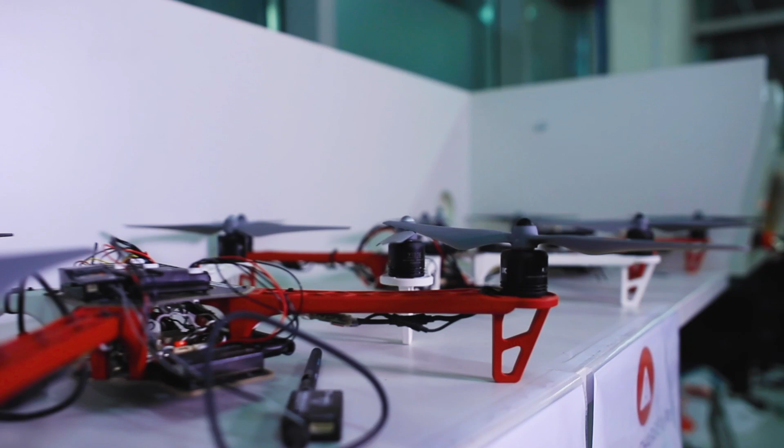Robotics, artificial intelligence and the systems that drive them are drastically changing the world we live in. From the factory floor to outer space, robotics is essential in optimizing industry, saving lives and bringing people together.

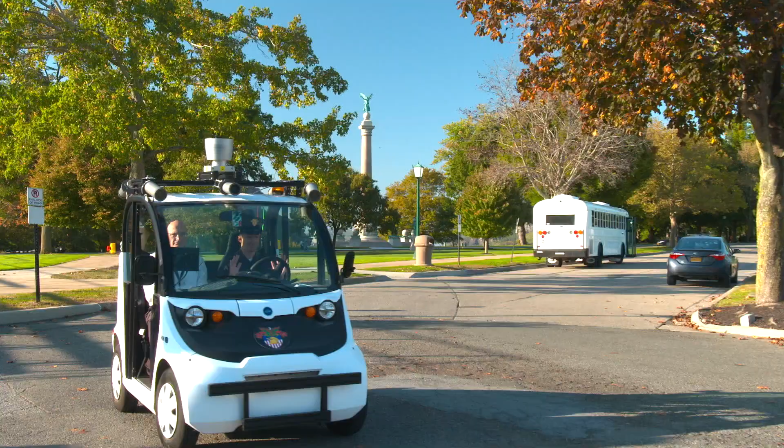Now in Macau, China, robots are connecting people in more ways than one as researchers, educators and practitioners in robotics meet for the world's most important robotics event. From autonomous driving to marine exploration, drone swarming to medicine AI, it's all here at the 2019 IEEE RSJ International Conference on Intelligent Robots and Systems. And you can catch it all here on IROS TV.

It's day 3 here at the Venetian Macau and things are really getting underway. We've had technical session after cutting edge forum, plenary after keynote, all with the very latest in robotics and AI. We've got plenty more for you today as we take a look at how robots are becoming ever more human, from human level intelligence to robots working alongside humans. Let's take a look at what's coming up.

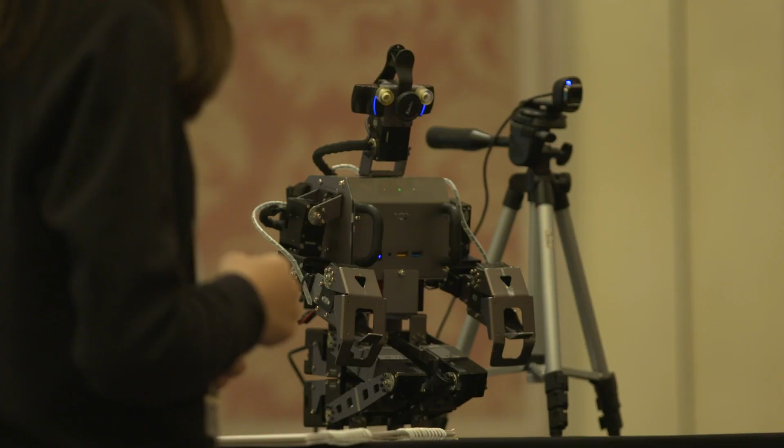So wouldn't it be cool if your robot could give you a high five after it delivers you your medicine in the hospital or after it helps cleaning up the kitchen? The reaction that we get with our robots when we perform a magic trick is often quite magical in itself, because people are like, how did the robot do this? That's incredible. Most of the robots are made by us, roboticists, engineers. We're good at making robots that are robust or powerful, but we're not good at making robots that are actually useful for the people.

Humans are complex and our interaction with robots can be somehow unsatisfying. So to take a better look at how we can optimize that human interaction with robots to make the experience smoother and more effective, I'm absolutely delighted now to be joined by Professor Gentiane.

Professor, welcome. Thank you very much for inviting me.

So what are the limitations today with human interaction with robots? Well, we do have a lot of robots that we can see here at the conference and the exhibitions and everything. But these robots are more like industrial robots, or robots to be in industrial settings or very closed settings. They're not really interacting with humans, and when they do, they don't have a lot of functionalities. So we still have hardware limitations that we need to overcome. Industrial robots is something on the side, but we're building so-called social robots that don't have any social function, or they don't do anything, so they're basically just like empty shells and boxes.

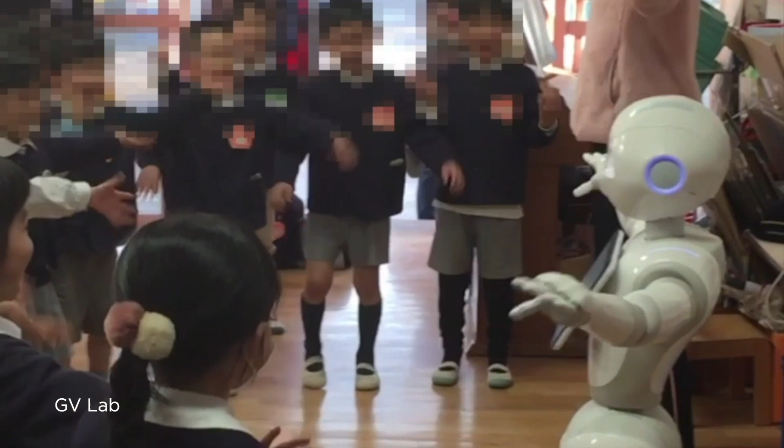Indeed. Well, give me an example of that. So for example, the robot Pepper that we're using a lot in our lab, and I'm very grateful to SoftBank Robotics for having made that robot, is a very affordable platform, but it's big. And when you have it in your living room, it is too big for the few functionalities that it actually has. And when you have it in social or public spaces, it's usually too weak in terms of sensing abilities and communication abilities. So basically it's a very fancy tablet holder.

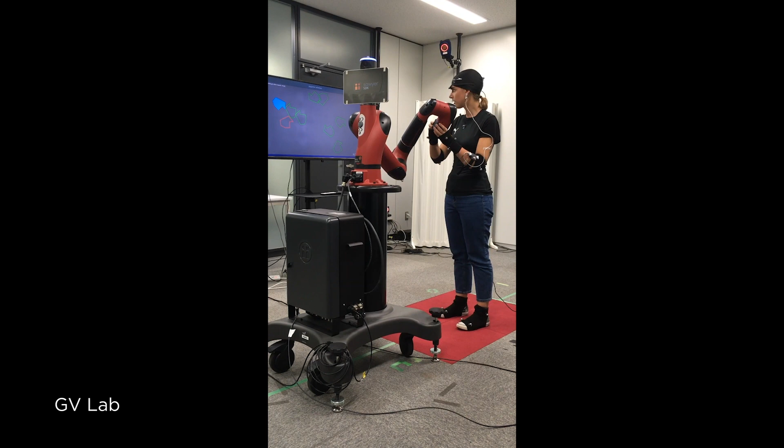Okay, and what's the answer? How do we design better robots that more fully fulfill our social needs? I think there is a big trend now in robotics and in HRI in general, which is really working in collaboration with potential users of robots, designers, and people who know how to create interactive systems. Well, give me an example of that.

So in my research, one of the examples I found the most striking is the work we're doing with ergonomists and designers, where we're trying to understand what the needs are for young retirees and how far the actual robots are from their ideal robots. When they create these ideal robots in their mind, after they have an experience with an actual robot, they change this ideal to something that is probably more realistic. Because science fiction movies and imagination have created these amazing, almighty robots, and everybody wants an almighty robot that is tiny, powerful, intelligent, cute, and sensitive.

On the other hand, we have, for example, Pepper, which is like a very bland white box of plastic, quite giant in your living room when you have a tiny house, and it does pretty much nothing except stare at you. We programmed it to be a little bit more intelligent than the regular Pepper, but it's still not perfect. If you ask, 'Pepper, can you give me a glass of water?' it just says, 'I'm sorry, I'm too weak to give you a glass of water, and I don't know where the glass of water is, and I cannot turn the tap on.'

So what are the next steps in bridging this gap? We have collected a tremendous amount of information about the ideal robots that people want to have. So now we're prototyping new robots that are smaller than Pepper, and we will conduct the same type of experiments to see how people like it better than Pepper, and if it matches better their expectation of ideal robots.

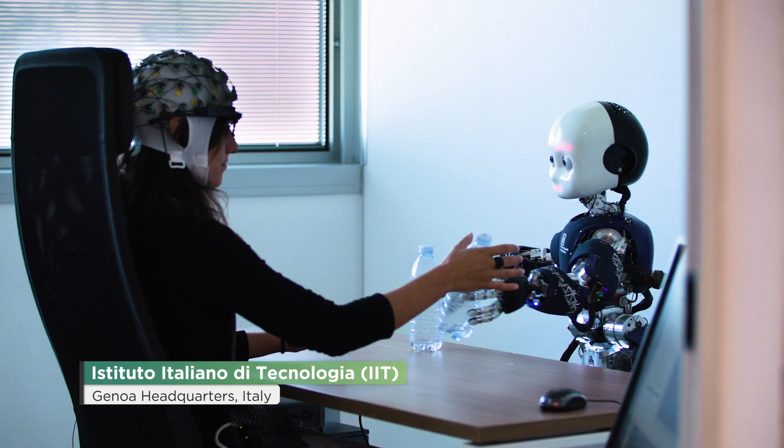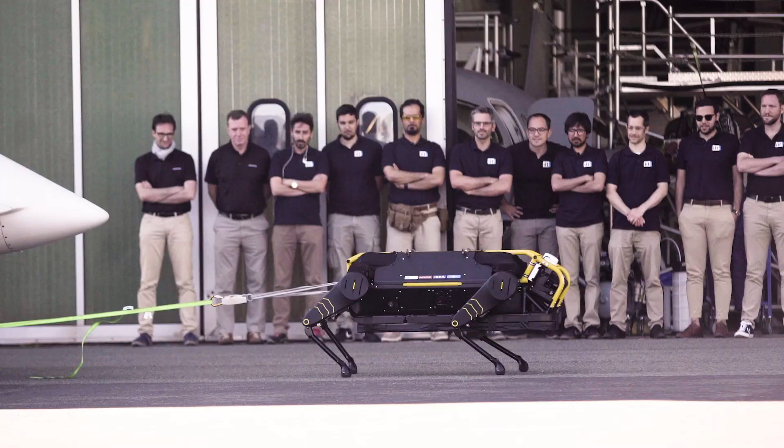I think robotics will play a very important role in the future. I see robots in healthcare allowing, for instance, surgery to be very precise. I see robots in case of disaster intervening to save human lives. In robotics, we have a mission to help and empower humans, and therefore everything we do has the human at the center.

IIT, the Istituto Italiano di Tecnologia, is a research foundation. We do material science and nanotech. We do robotics, of course. We also do life technologies, which is biology and possible applications to healthcare.

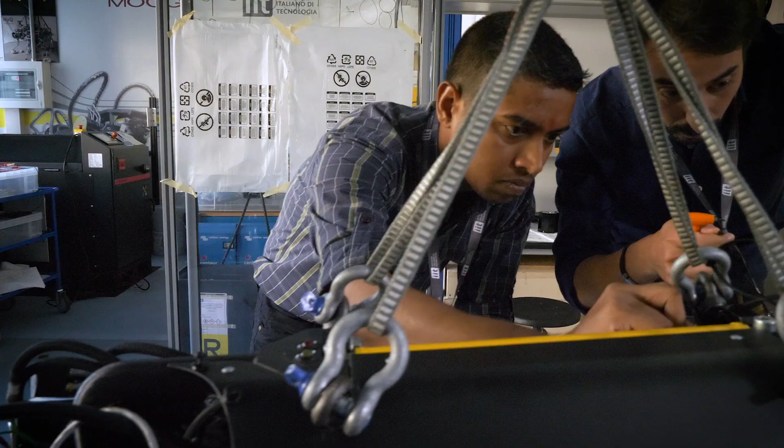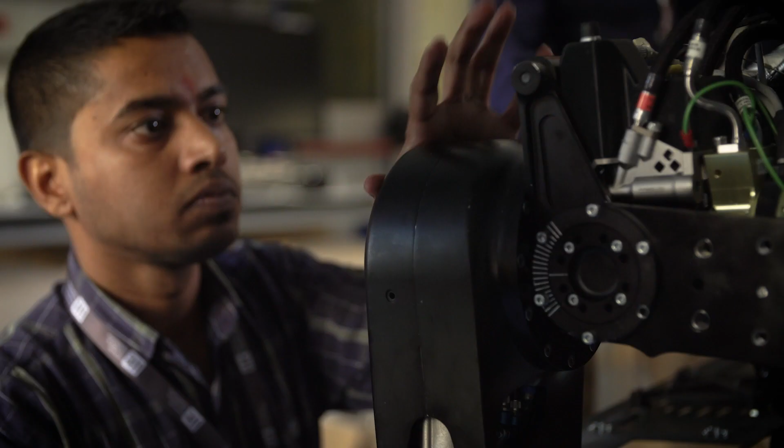We have a very large program in robotics, with more than 350 people. We cover the entire design process, from the mechanics and electronics to the software. It's very diverse, but in a sense we're developing this family of robots, each one tailored for a different sector.

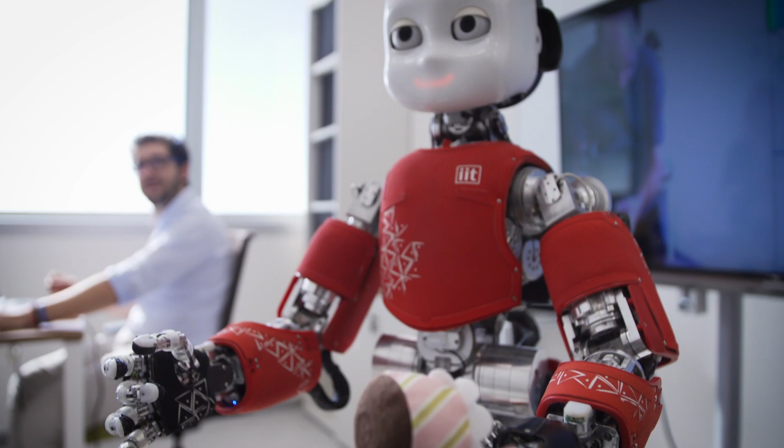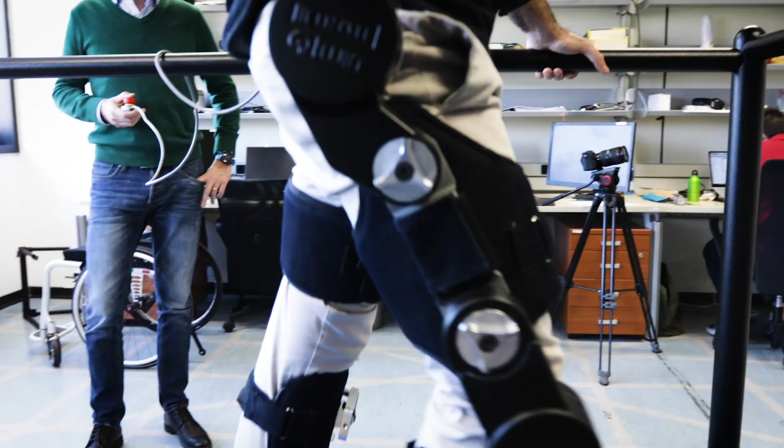In the Advanced Robotics Group, we develop robotics for biomedical applications. This comes in two flavors: one is surgical robotics, and the other is rehabilitation. Here we develop exoskeletons or prostheses. We're developing exoskeletons also to help human workers in the factory.

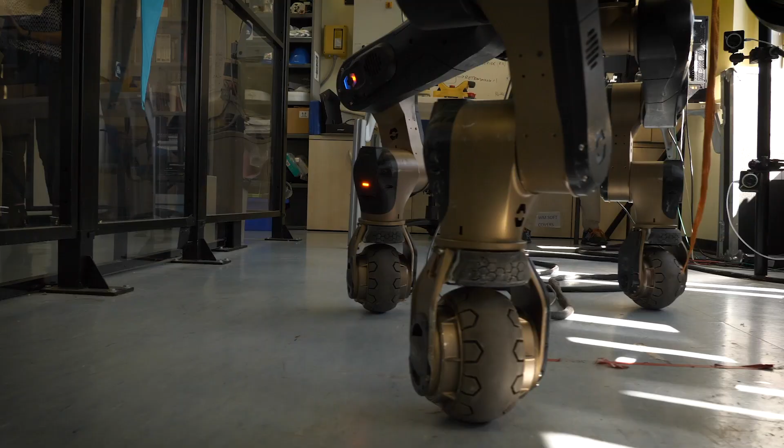We're doing, for instance, quadrupeds that can be deployed in case of disaster. We're also developing humanoids for the same purpose, so that humans can be safe while the robot carries out a particular task.

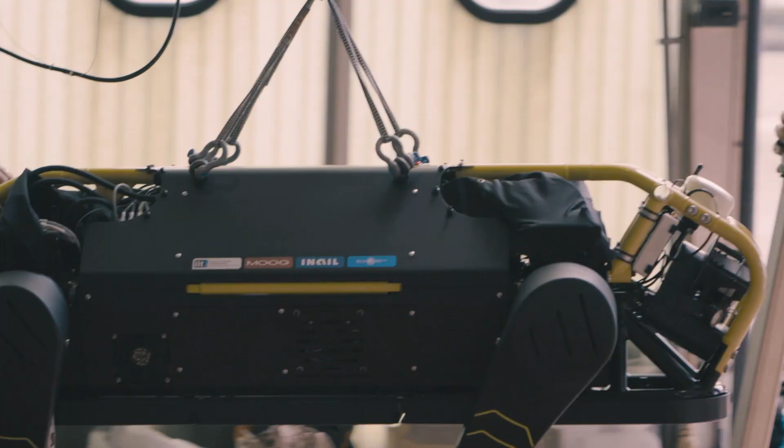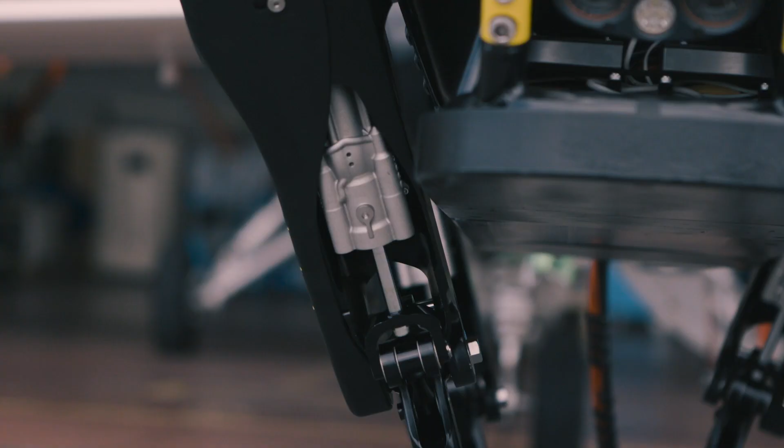The whole purpose of legged systems is to go onto environments where wheeled and tracked vehicles cannot go. The most recent version of our robot is called HyQReal. To demonstrate its power and its nice design, we brought it to the airport of Genoa so that it can pull a 3.3-ton airplane.

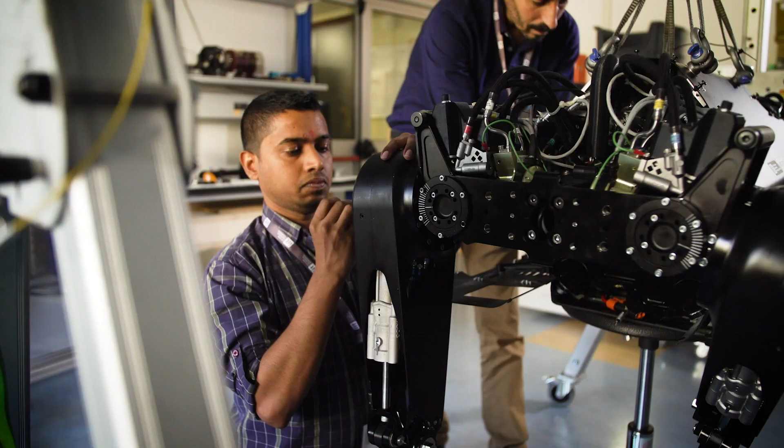All our robots are driven by hydraulic actuators. The hydraulic actuator has a very high power density and can cope with impacts very well. One of the grand challenges of legged systems is how to place the foot on a correct spot, so we have developed an approach in which footholds can be selected and corrected in a very fast way.

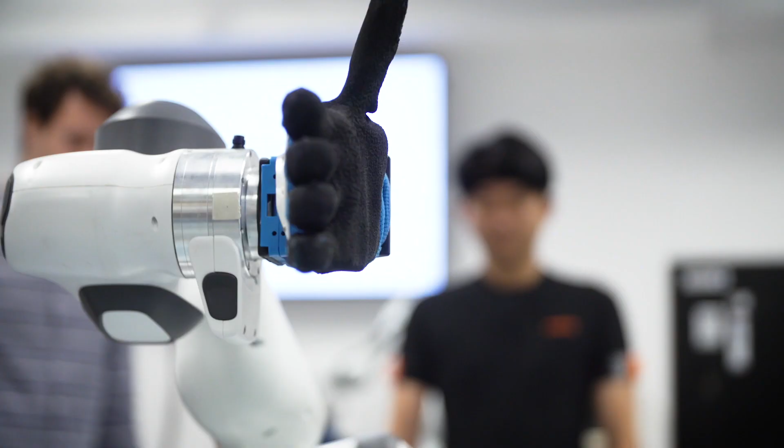At the moment, our focus is industrial robots. They can be fixed-base or mobile-base. Mobile robots can be just like humans, going around, doing some scanning, understanding and responding to the needs of people. We recently created MOCA, which stands for Mobile Collaborative Robot Assistant, the integration of a robotic arm and a mobile base. The more you bend your body, the faster the platform will move.

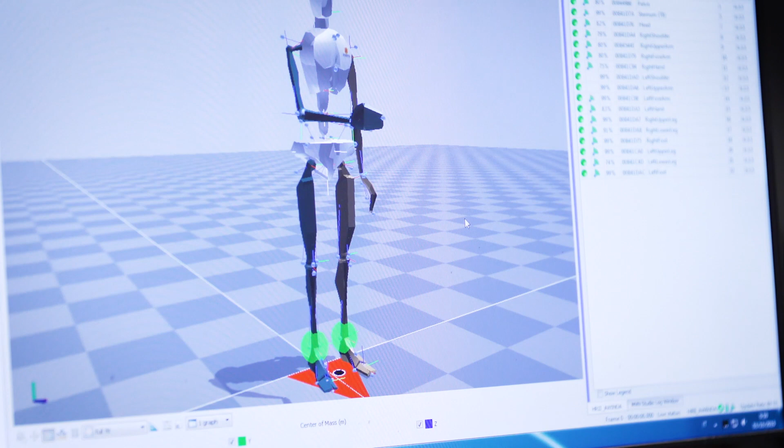We are trying to introduce these systems in industrial applications to see who is the co-worker they are supposed to work with, to respond to their intentions and needs, both physical and social, and eventually to improve their ergonomics of working. It's a revolutionary way of thinking about improving productivity in industrial environments that are dynamically changing.

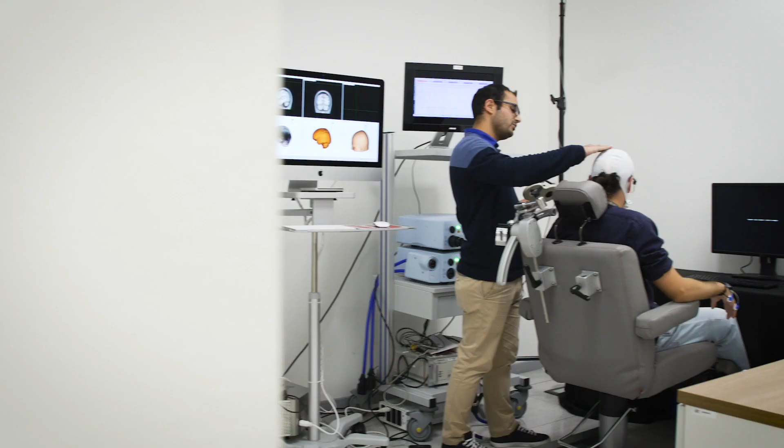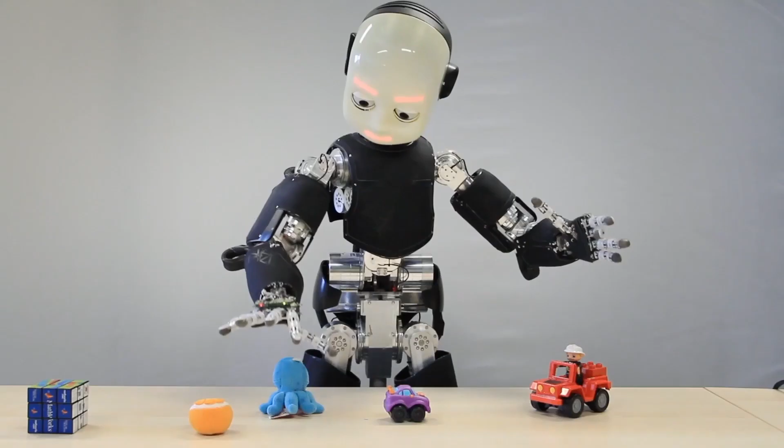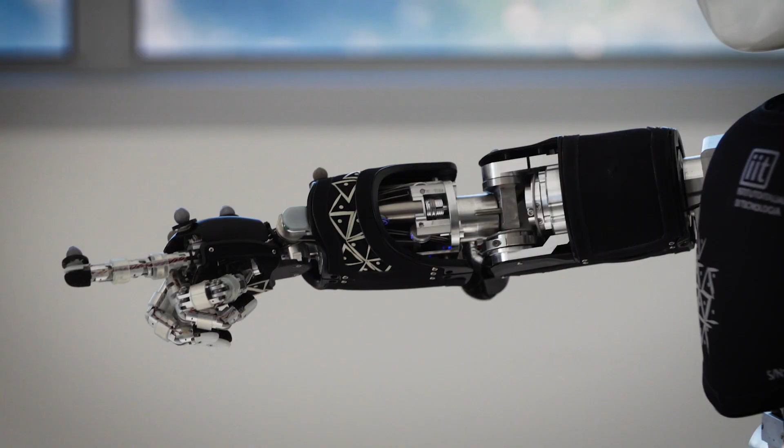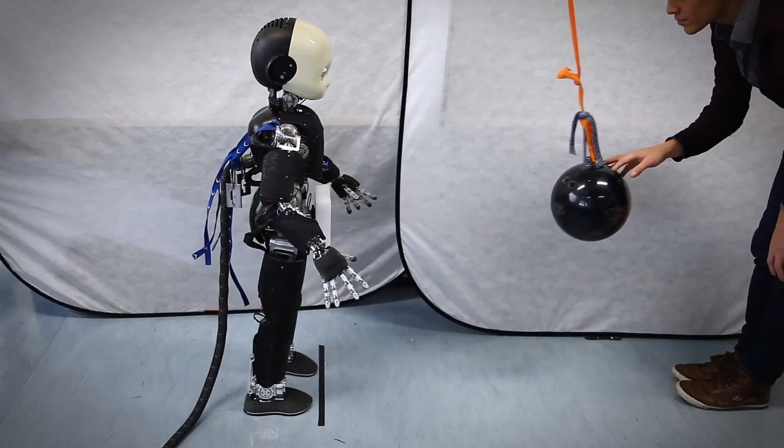We look at how biological systems work and try to develop technology and integrate it into robots to make them fully autonomous. We look at neuromorphic or event-driven types of sensing devices for vision and integrate them on humanoid platforms. We're mostly using the iCub robot to improve its interaction with the external world. The idea is to integrate neuromorphic computing devices to give autonomy to the robots thanks to low-power devices, very efficient computation that is more capable of extracting information from external signals.

We don't really yet understand the mechanisms that the human brain uses during interactions with others, humans or artificial agents such as robots. We try to address that with scientific methods. The project we're working on focuses on what sort of conditions make humans attribute mental states to the robot and make humans attuned to the robot.

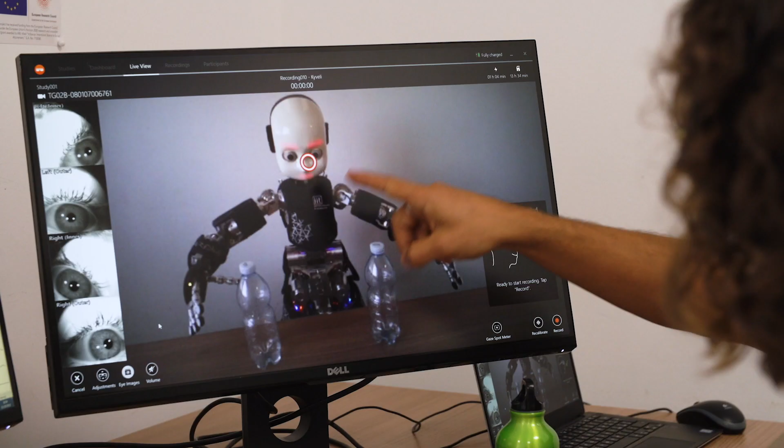We try to tap onto very implicit and subtle mechanisms of social cognition. The way to measure for us is to use methods such as eye tracking, EEG, or reaction times in a task. We actually need to work with roboticists, developmental psychologists, cognitive psychologists, and social psychologists to develop paradigms and address the questions we are trying to address.

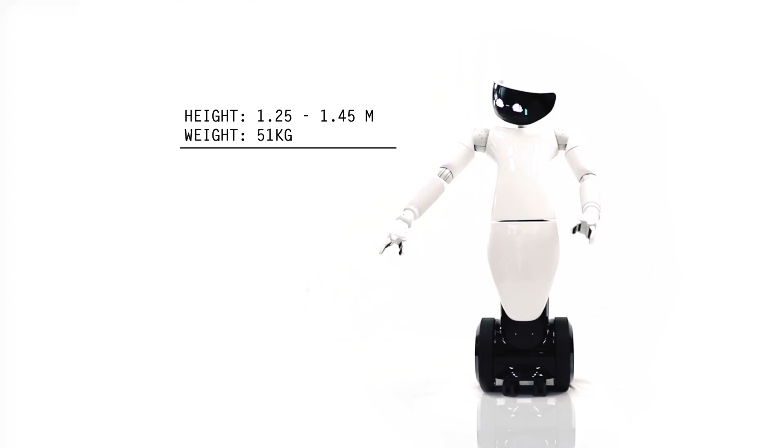IIT has, let's say, a double mission: to do research, but also to transfer technology to the market. We're doing startups, but we're also patenting. We have a number of joint labs with companies where we're developing new robots, and we have collaborations with hospitals to deliver the robots to the healthcare sector.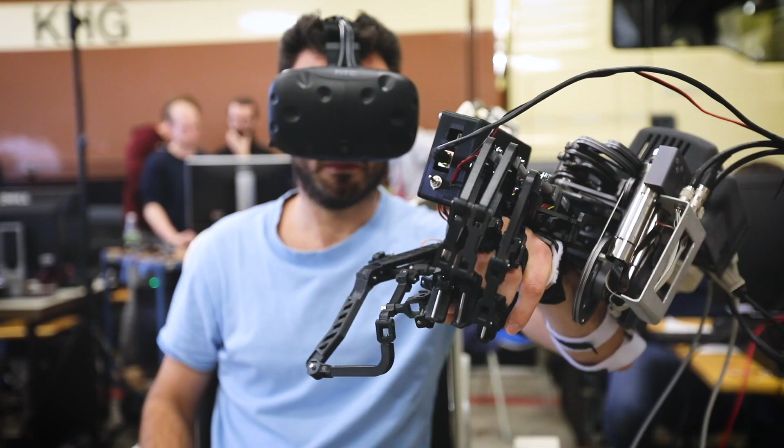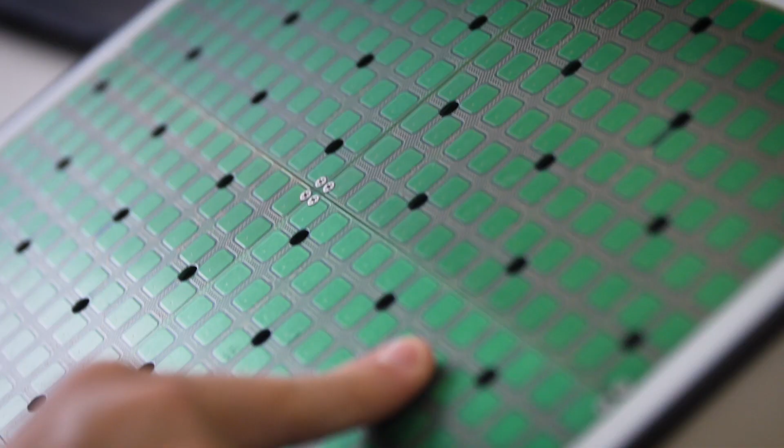I think robotics is amazing. First of all, it's our flagship project. We have brilliant researchers who are really working at the forefront of research in robotics. One of the most positive points about IIT is that you know a lot of people with different backgrounds, different expertise. We actually impact each other's work as well as our own research. It's a very unique environment, given the possibility of interactions between disciplines. I don't think there's a better place on Earth.

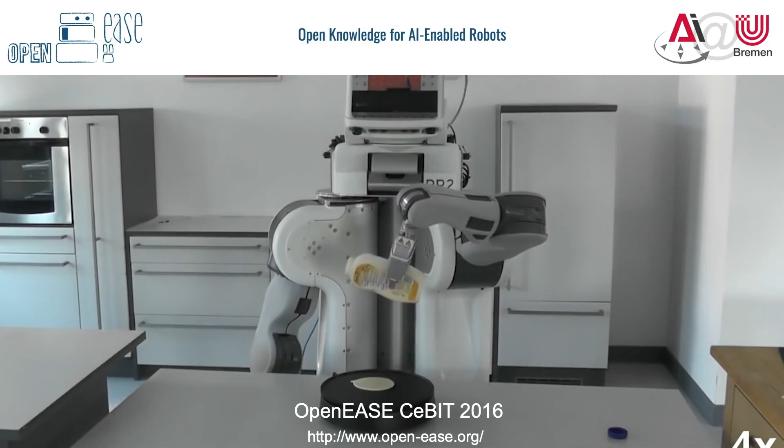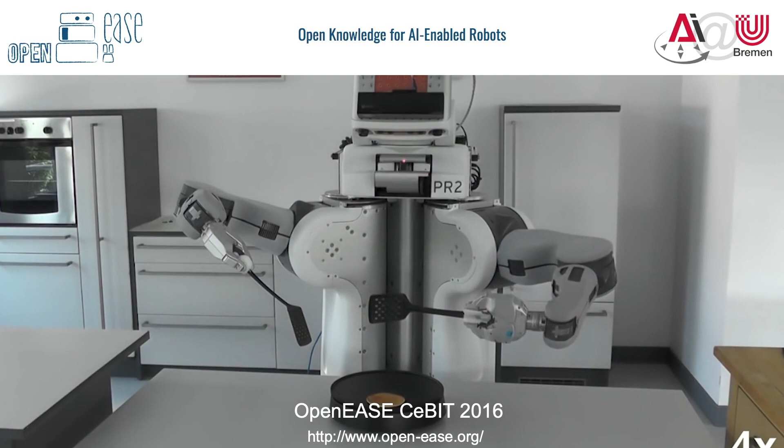So now you don't have to program everything in. The robots can learn for themselves as they experience the world and go about doing things in it. You brought these great examples with you, so maybe you could take us through them. Yeah, sure. This is an example from the work of Michael Beetz at the Institute of AI at the University of Bremen. It's a nice example because it shows difficult robotics tasks being done by a PR2 robot. It seems simple to you and me, right? But the problem is that it doesn't necessarily know what these things look like.

It certainly doesn't know where things are, and it has to figure these things out. So it has to be able to reason about the world around it. It also has to be able to anticipate what will happen when it does something.

When you and I work in the world, everything that we do, well, what would happen if I did that? That's not been the way we've thought about robotics today, but that's the key to cognitive robotics: continually anticipate the outcome of actions and the need to act. And that's what this work shows you can do now.

So what does the future look like? Where do we go from here? This kind of robot can help us, but we need to share, to live together, much more we need the interaction, not only just sharing a task, but interaction, helping each other. This kind of mechanical interaction and this kind of task sharing.

Complete one task together. I think that we're going to see robotics become more part of our lives, and as you said, they're going to become a seamless part of what we do. But we need more research, and the research has to be not just at the applied level, it has to be at the fundamental level as well. But I'm incredibly optimistic about the future. I'm looking forward to working in it for a lot longer.

Well, gentlemen, thank you very much. Really appreciate it. Thank you very much. Appreciate it. Thank you.

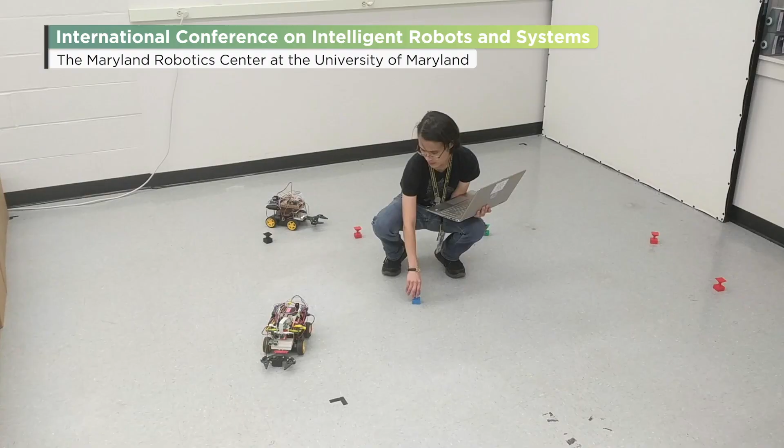Over now to the University of Maryland and the Maryland Robotics Center, where they're working hard on their mission to advance robotics systems. The main mission of the Maryland Robotics Center is to advance robotic systems, the underlying component technologies and applications of robotic systems through research and education that is interdisciplinary in nature and based on a systems approach.

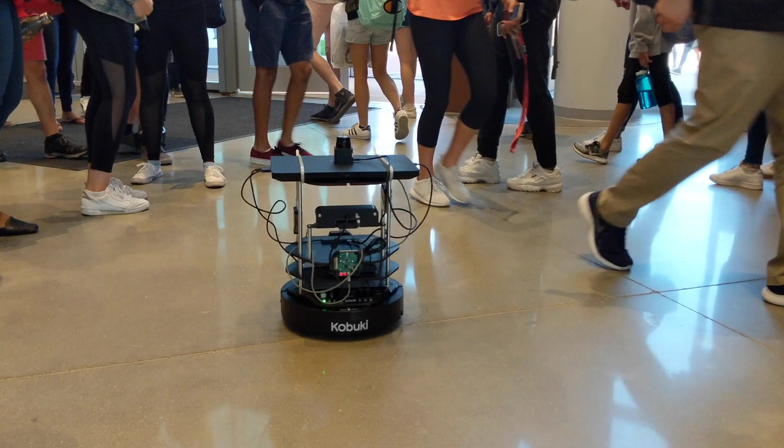We have a great variety and diversity of talents and specialties that we have here, many labs from different aspects of robotics. The Maryland Robotics Center consists of over 40 faculty, a number of unique facilities including the Unmanned Aerial Systems Test Site, the Fearless Flight Facility, and the Neutral Buoyancy Research Facility.

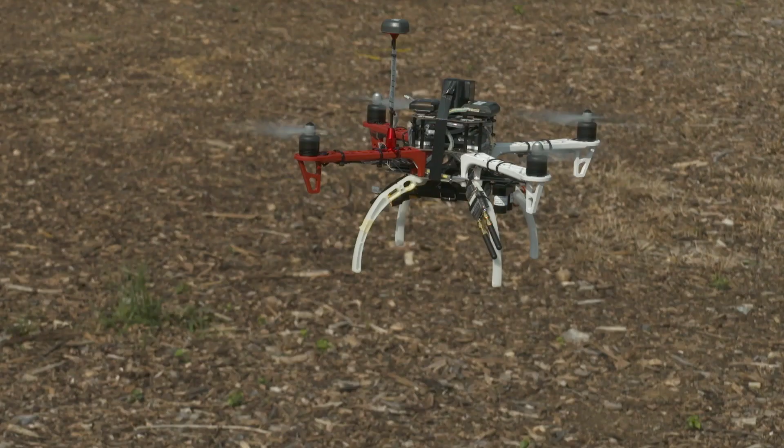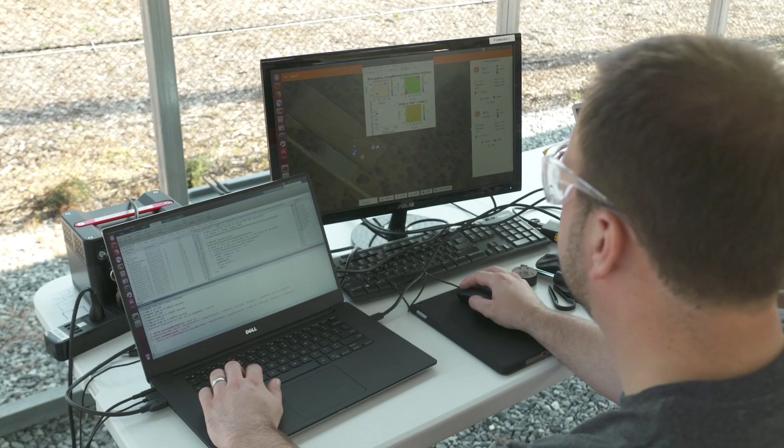The Fearless Flight Facility is an outdoor netted facility that we have close to campus. We are located within the flight restricted zone here in DC, so we do a lot of test flights out there. Today we are here at the Fearless Flight Facility, where we have multiple quad rotors which are taking off. They're using synthetic flight data to complete this map and search mission. As they explore the environment, they use the idea of mutual information to guide their search.

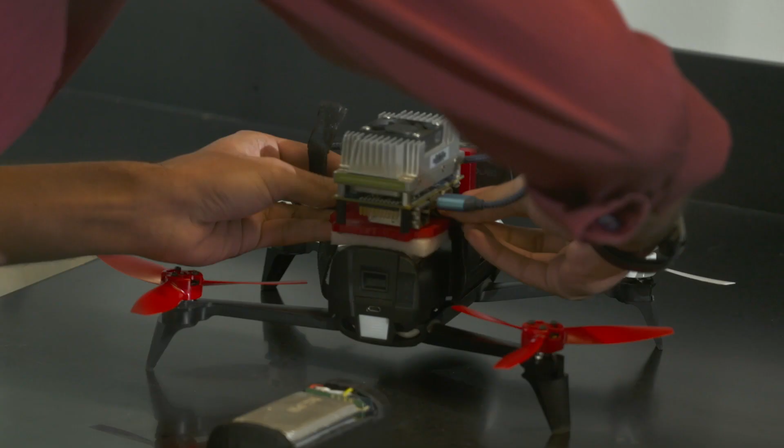The Iribe Drone Lab is a brand new shared lab that allows us to study aerial robotics using motion capture cameras. My work in drone racing involves a lot of integration. It starts with the hardware in terms of building a drone and getting it to fly, integration of sensors and getting that connected to the drone itself, and then a lot of programming. We try to figure out what the camera is seeing and try to integrate that with the drone itself.

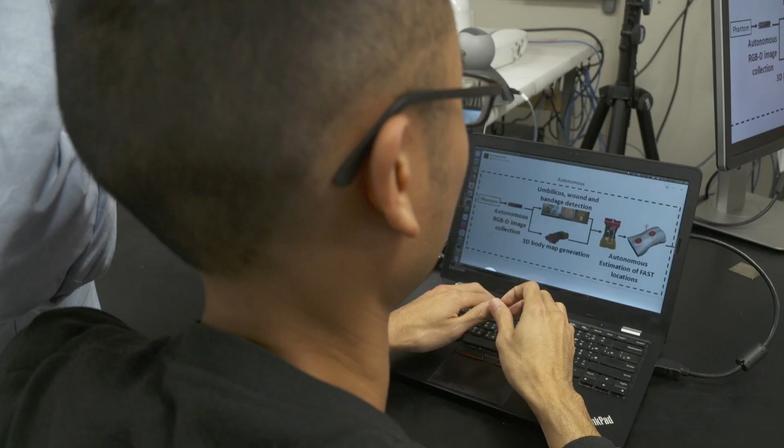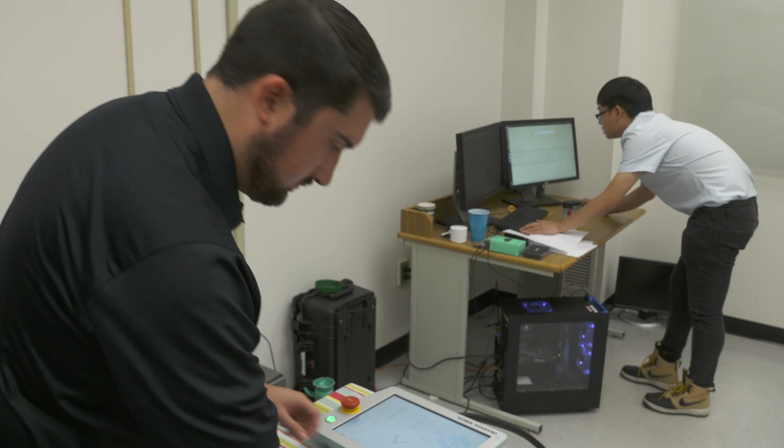We try to think of robots, whether they are one or several, as a system, and we try to have this wholesome approach to the design of the robots, to the evaluation, and so on and so forth. And that's kind of unique. So one example is this: I'm trying to design robot arms. Can you do the design before you go create a single screw? That's how we do airplanes today, but we don't do this for robots. So there's a little bit of a strange thing here, right?

In the Bio-Inspired Advanced Manufacturing Lab, or the BAM Lab, we try to use micro and nanoscale 3D printing technologies to solve biomedical challenges. And so in the context of robotics, we're trying to create an entirely new generation of soft prosthetics that are built using 3D printing.

The way that we build our soft robotic systems is that we use a special type of 3D printing. What makes this type of 3D printing special is that it's just like a color printer, but instead of printing just one page, we're printing multiple pages, one on top of another. And what makes it great for soft robotics is that we can print different types of materials, like soft, flexible materials and hard plastic materials that are fully integrated, so that after the printing process, in a single print run, we have something like this.

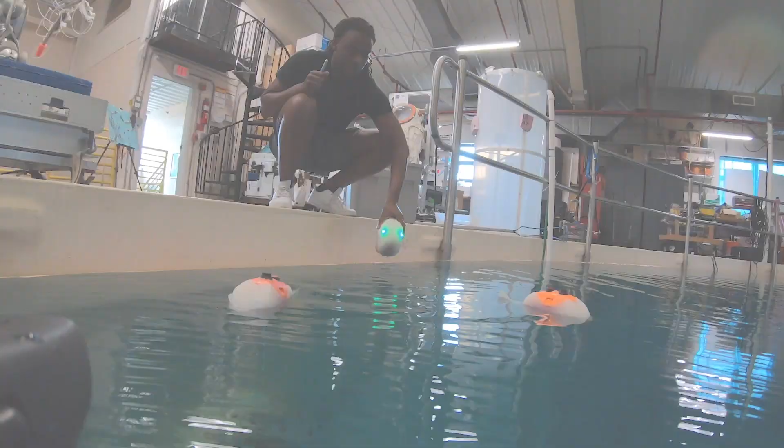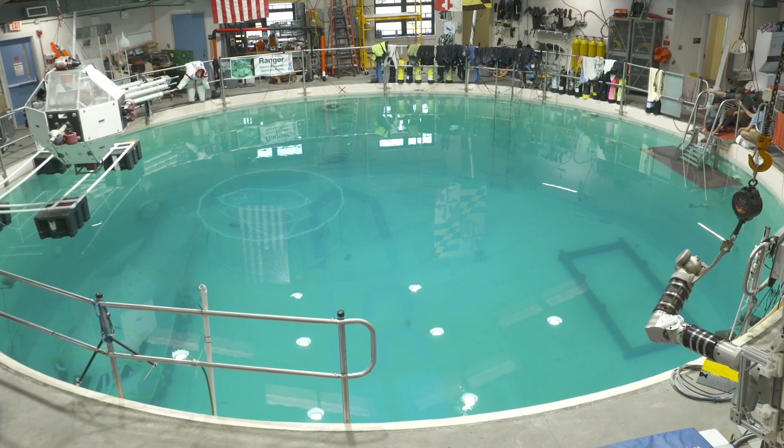The Neutral Buoyancy Research Facility is the largest underwater research facility on a university campus and the only one equipped with underwater motion capture. This is where we study autonomous underwater robots and space systems using the underwater domain to simulate microgravity. We have a tank that's 50 feet across and 25 feet deep, and we use it to simulate space. There are only 6 tanks like this in the world.

This is the only neutral buoyancy facility in the world on a university campus, and it's one of only 2 active facilities in the United States. We're very pleased to have this unique facility.

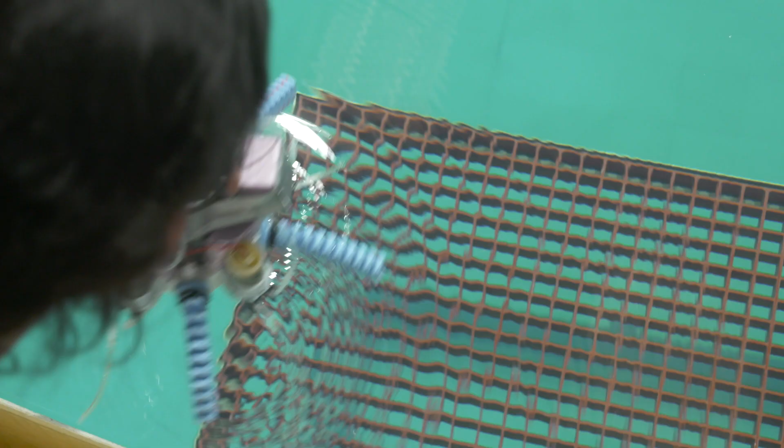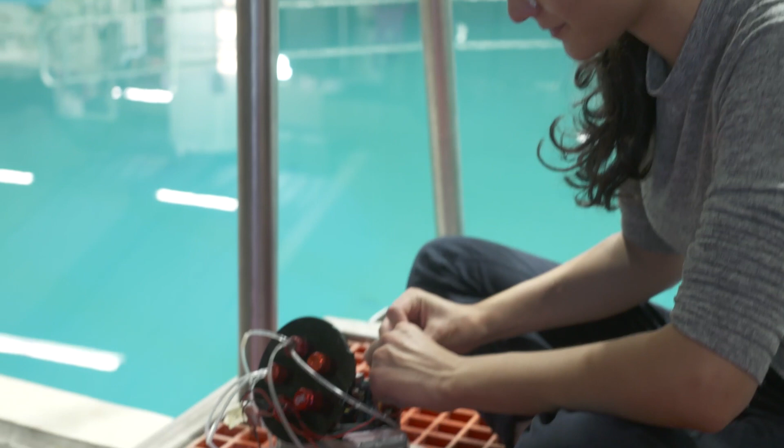We put our robots in the water. We actually put people in the water, either directly as if they were inside a habitat or wearing spacesuits. We're developing robotic systems that operate in many different environments to try to ensure that we can have the technology available as we advance outwards into space.

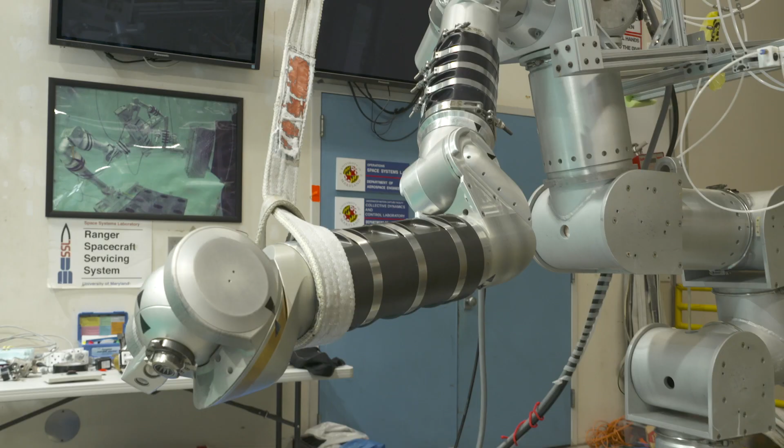That we'll have robotic systems ready to go along with the humans. One of the unique things about this laboratory is everything you see here is designed and built here almost entirely by the students. So if you look at a robot arm like this, that was originally developed to fly in the space shuttle, it was developed by students.

And we still operate it using graduate students and undergraduates. We try to involve students across the spectrum, from freshmen all the way through seniors, graduate students, and get them all involved in the engineering development process.

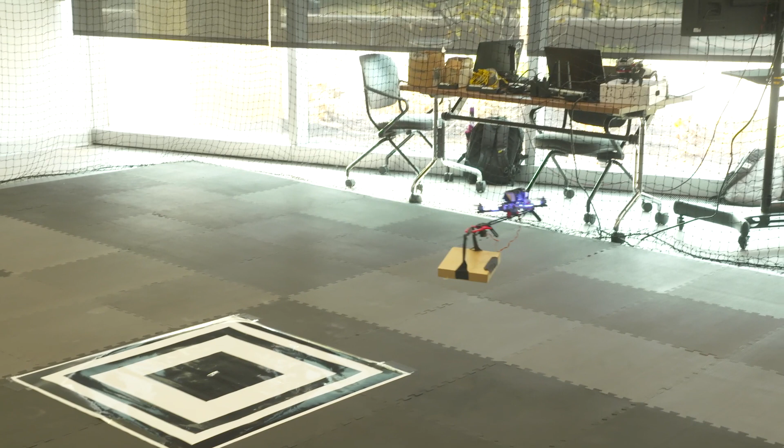I'm only a small part of this, so I'm a faculty advisor, which means that I sit in my chair and really think up cool ideas, and then the students are the ones who are actually executing. They're the ones who actually know what's going on, how to fix things when I break them, and actually are the ones who are executing.

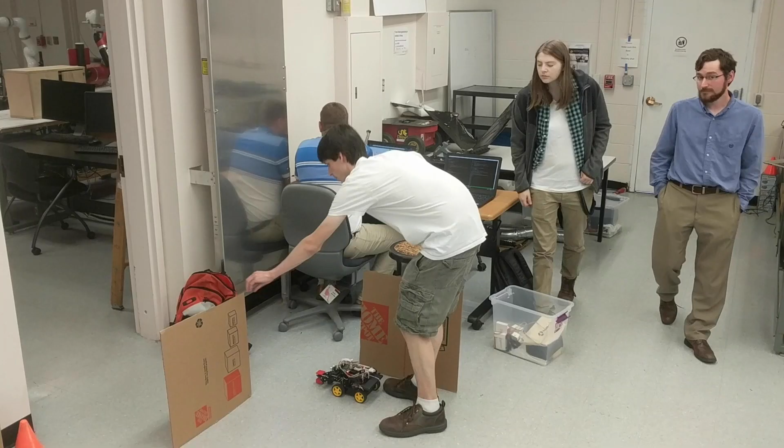Here in the lab, we have 4 faculty from computer science and engineering who work here. We have postdoctoral research associates, people that already have gotten their doctorates. We have graduate students, we have undergraduate students, we even have high school students. And they work in little teams, doing experiments, doing theory.

The future of the center is very bright. Come to the University of Maryland. It's a great university. You ought to go to grad school here. You ought to go to undergrad here.

Our sense of touch is essential for almost everything we do, and understanding how this works can help us better design systems that rely on it, from haptic interfaces to physical human-robot interaction. Covering it all is Professor Katherine Kuchenbecker, who looks at haptic intelligence.

Thanks very much indeed for taking the time to talk to us today. We really appreciate that, so thank you. My pleasure.

Why is touch important when it comes to robots? Well, touch is, I think, the most underappreciated of our senses. You can see, you can hear, you can smell, taste, and touch. Unlike the other senses, touch is distributed through your whole body, and it's driven by many different kinds of receptors. You can feel pressure, vibration, pain, stretch, inside yourself, outside yourself, the pose of your body. We really, as humans, almost just take it for granted.

But almost all robots that we build today have a very primitive sense of touch. They typically know where their body is in space, but they know almost nothing about whether that body is contacting the world. And thus, when they try to interact with things, say like pick up a cup, for a robot to do that well and not crush your wine glass or drop things all the time, it really needs a sense of touch. But we're still in the very early days in terms of what makes good touch sensors in different situations for different parts of a robot's body, and how we can process that information to enable a robot to do things autonomously with objects and also around people.

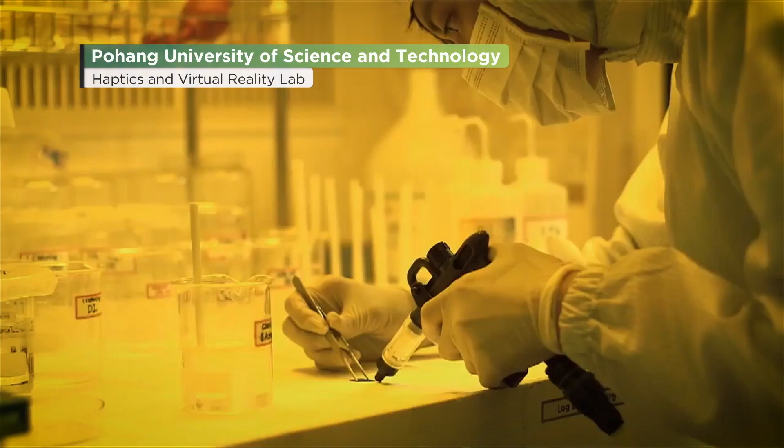Pohang University of Science and Technology, we call POSTECH, was founded about 30 years ago, and we are very proud that we educate leaders, future leaders of Korea and global science and engineering.

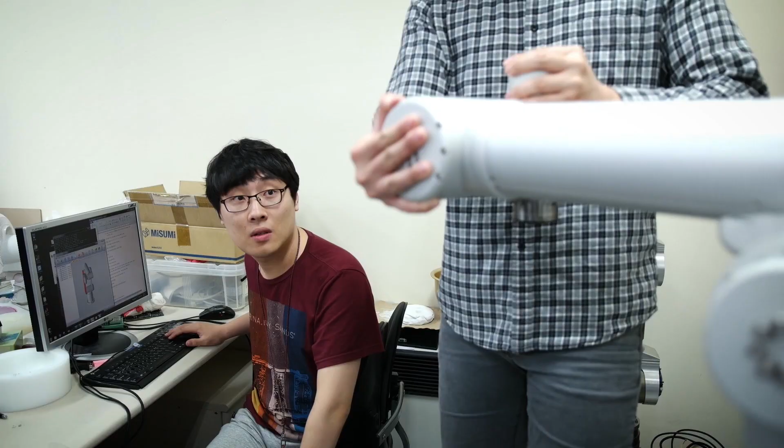Department of Computer Science at POSTECH, we have 21 faculty members and about 350 students who are focusing on haptics, robotics, and IT convergence engineering and different algorithm development. We also host our National Institute of Robotics on the POSTECH campus.

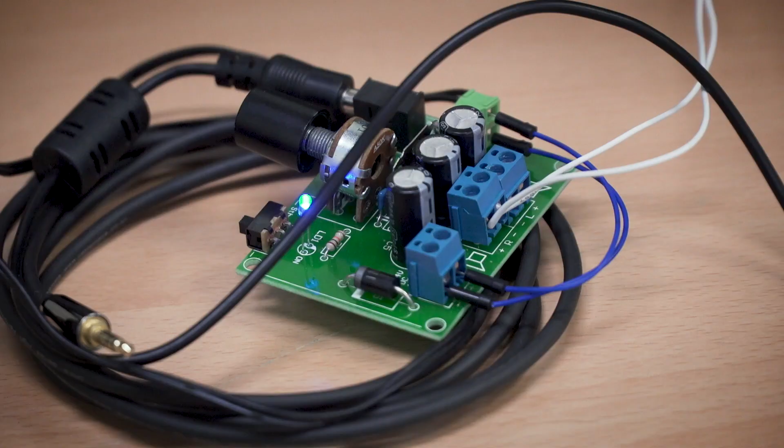People define haptics in many different ways, but to me, haptics is one nice way to allow users to interact with computers and robots physically using their body and the sense of touch. Our mission is to improve the human aspects of haptics research.

So we have people from mechanical engineering to design devices. We have people from electrical engineering for system control and other communication-like issues. We need people to make good rendering algorithms from computer science, and we need people from psychology to understand the human aspects of haptics and VR.

These days, I have one umbrella theme, which I call automatic authoring of haptic content, which allows people to record or create haptic content very easily and sometimes automatically. For instance, when you press your skin, we want to record its force response and recreate that response in a virtual environment, or we can convert sound like music to tactile effects.

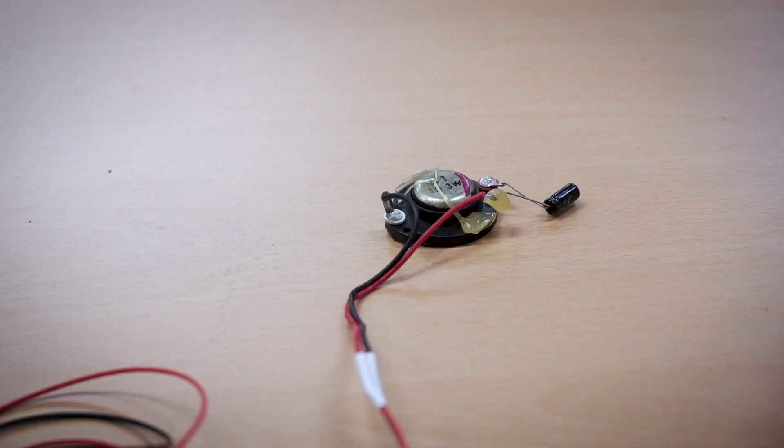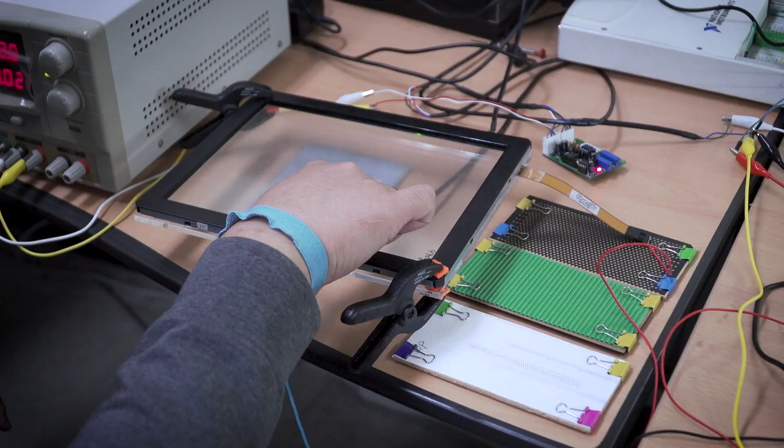We can analyze a video and, for example, analyze the motion of a main character, then make very nice motion effects. I'm working on data-driven haptics, modeling and rendering viscoelastic objects.

Haptics can be used in every item we build in the virtual reality world. The more realistic the virtual world is, the more haptics is needed.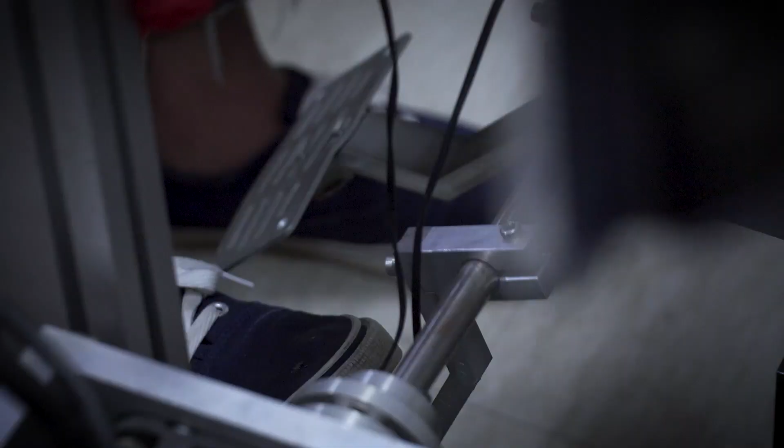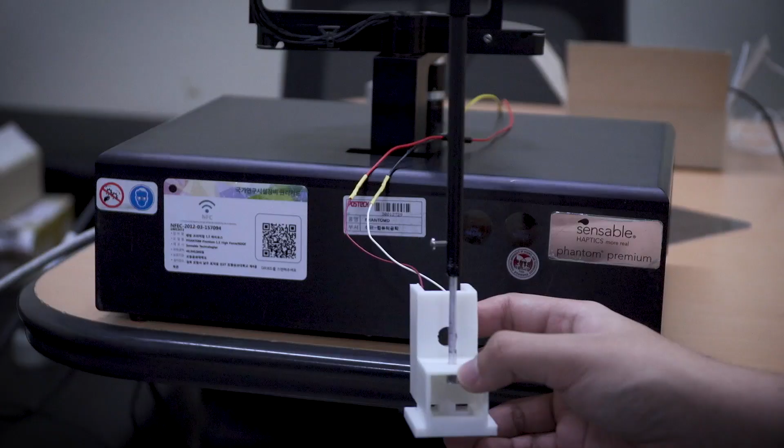Data-driven haptic rendering is a realistic haptic rendering method that simulates real-world haptic responses using many measured data such as acceleration, force, or temperature. We are developing this technology to bring real-world objects to the virtual world. Data-driven haptics performs in 3 steps: data collection, modeling, and rendering.

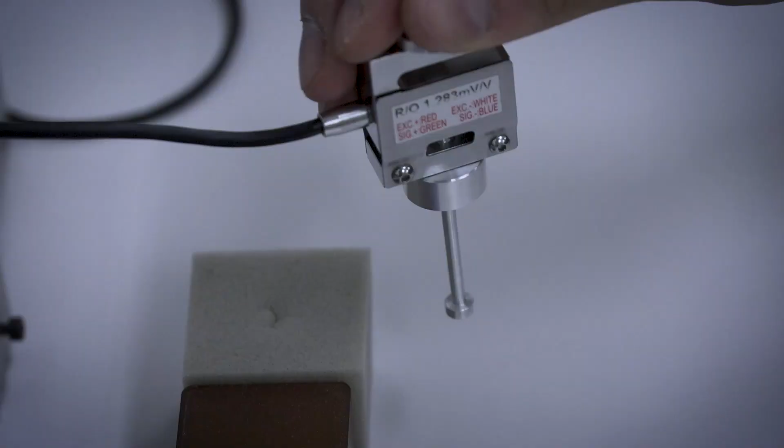This can be a simple approach for anyone who wants to build a haptically immersive application.

I'm doing research on 4D effects synthesis. 4D effects authoring is manually done by 4D effects designers, so the production of 4D content is very labor intensive and time consuming. Our purpose is to automate this process.

We investigate recent computer vision and signal processing technology and apply them to extract audiovisual features. By extracting those features, we want to render effects representing high-level information. Also, we want to expand the application domain to other entertainment such as watching sports or games.

I'm working on augmenting multimedia contents for consumer electronics. The application area consists of the whole consumer electronics, from mobile phones to cars, like touch screen displays or vibration, and even some robotic devices. We can add haptic interactions for that to improve usability and enhance user experiences.

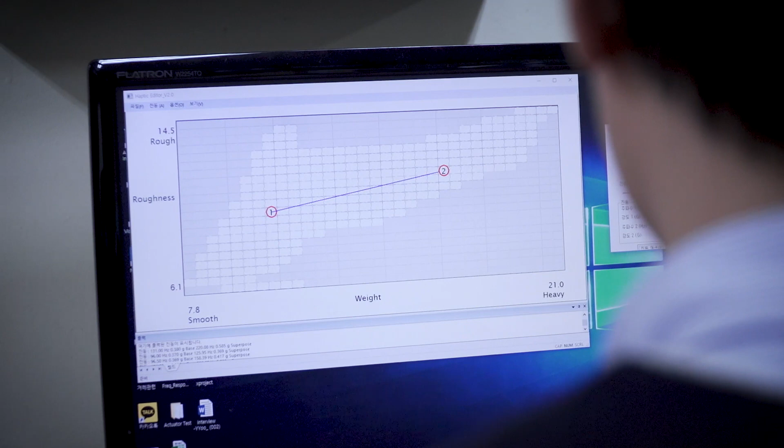Once the target device is decided, generally we have 4 steps in the whole procedure of our research. We decide the haptic actuator to implant into the device, and we evaluate the whole scenario by conducting a user study.

Virtual realities, including AR and VR, are quite different from previous computing environments such as mobile computing or GUI-based computing. It gives you a lot of information about what you have in your real life, or more situated interaction. The purpose of our study is to make haptic interaction more intuitive and useful.

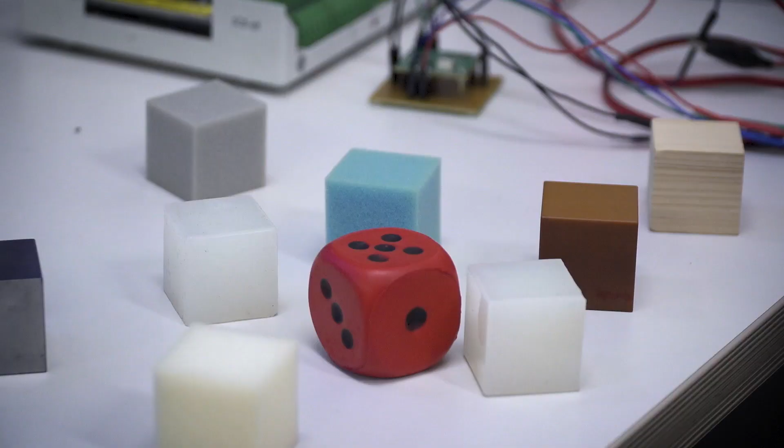We are trying our best to provide the right information at the right timing, which helps users perform specific manual tasks. We designed some sensing platforms to specify when to provide haptic feedback, and we design some haptic hardware or haptic displays to present pleasant tactile feedback.

Haptics started as a part of robotics, for like teleoperation. From the 1990s, it became a big part of robotics and in virtual reality and HCI. Still, it's immature. We have a lot of things to do to make good haptics technology so that other people can use it easily in their daily life. So I wish more people get interested in this area and participate in doing good research in this domain.

So we all think robots are getting more human, but can they do magic or make music? To answer the question, it's time for another competition: the Humanoid Challenge.

Now, let's do some magic.

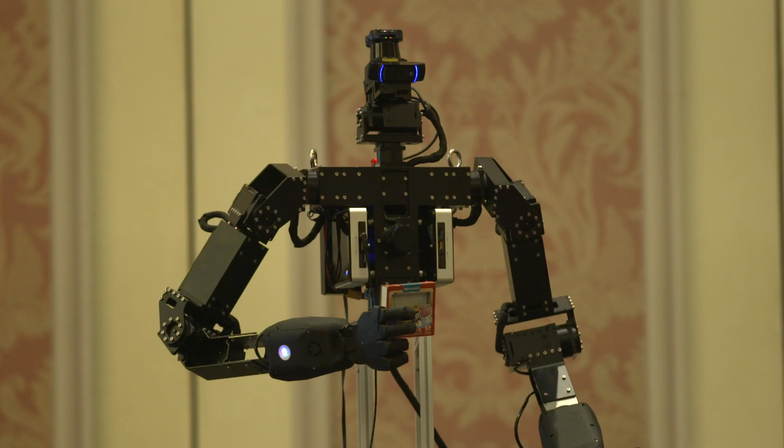This competition is the IEEE IROS 2019 Humanoid Application Challenge. Robot Magic and Music is the theme for this year.

Cross your arms in front of you now.

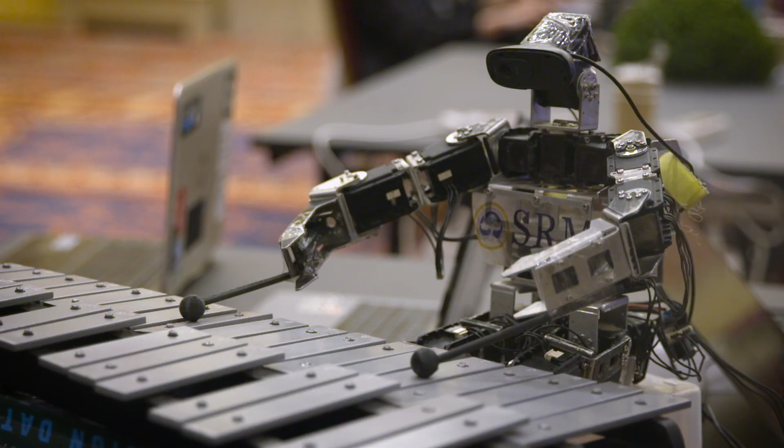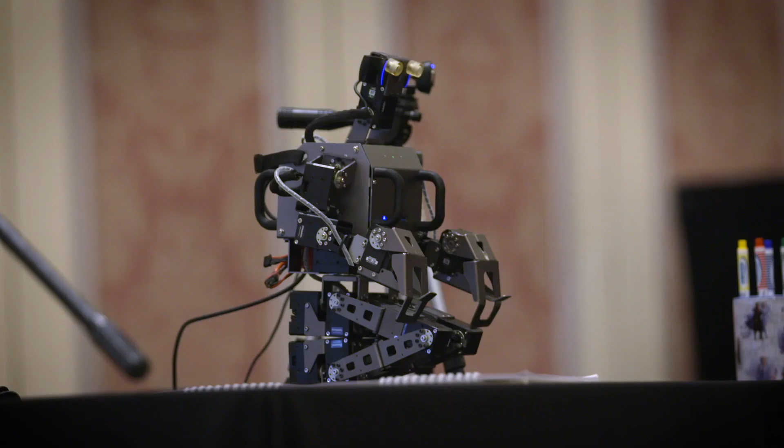We have robots performing either as magicians or musicians on stage. The goal of this competition was to provide a competition that is not strictly quantitatively judged, but to have something that is a little bit more open to interpretation and gives the teams a little bit more creative freedom.

We are the team from Canada, University of Manitoba. The main challenge of having the robots as a band is the synchronization. We also have computer vision that works on the robots, so they can calibrate themselves to the drums and calibrate themselves to the keyboard.

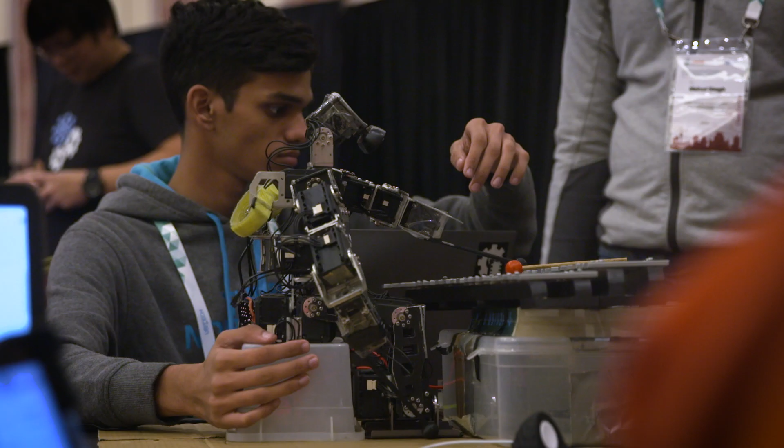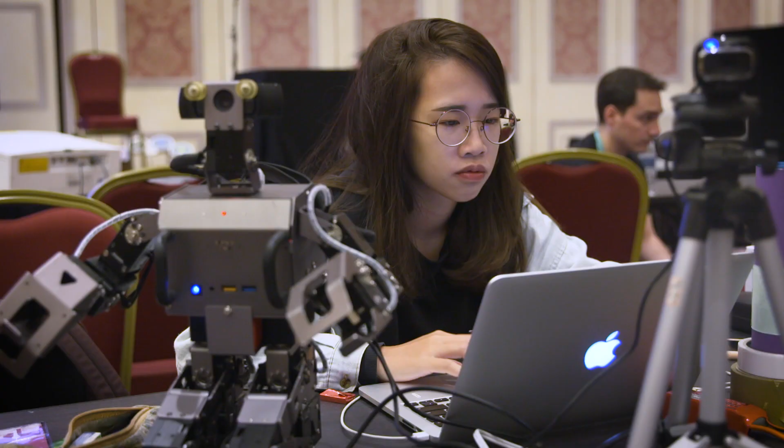We are from India. We actually came here for the Humanoid Application Challenge, and we are going to play xylophone out of our humanoid bot. The bot is programmed in such a way to adapt to the situation where it actually plays a song.

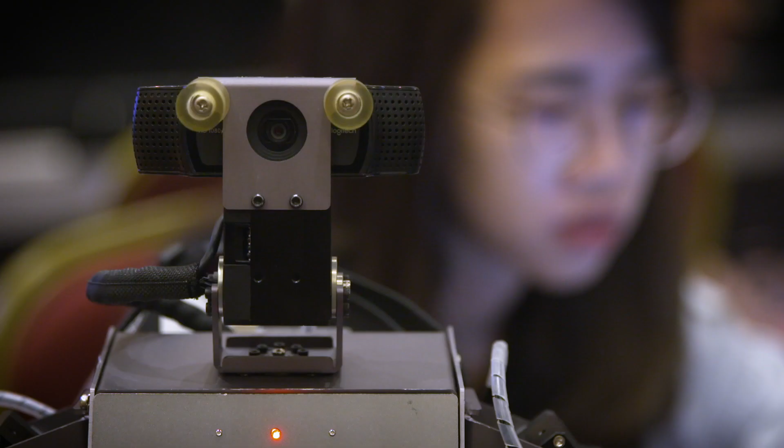My team is from National Taiwan Normal University, and this is our third year to participate in this robot magic show. Our robot is made by the Korean company Robotis, and we use it to develop our code. He's going to do some magic, and this is a secret, so I cannot tell you.

They look at a picture and try to interpret the entire image in one pass, in one go. That's not how human perception works. I think magic is a really good benchmark problem for that, because magic is all about misdirection of attention. So I want you to look here, but this is where the trick happens.

Please unveil to the audience what we've done here. This is very new to us. We have to develop a new framework for the robots to work together. We have to make the robots able to communicate with each other. We want to use a robot to develop a different kind of technology, like using a robot to interact with a human.

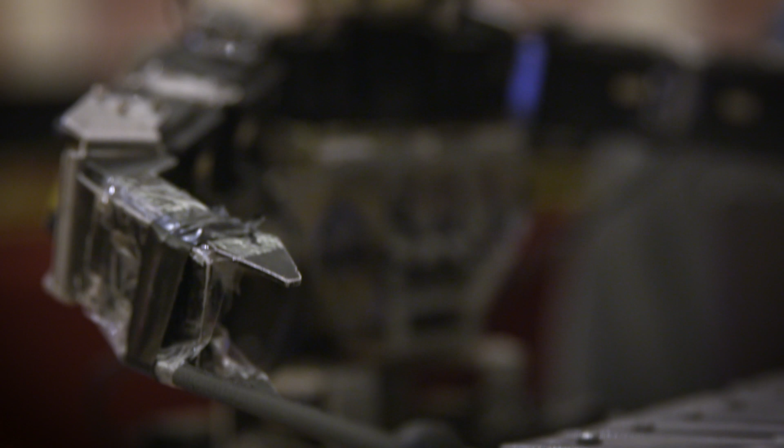It's all about the exposure that we get. We actually are undergraduate students. I'm currently in my fourth year, so it's a good platform to communicate and compete with international students as well. So yeah, that's the plan.

What I like most about it is often the reaction of the audience. Of course, we need to interact with the audience, and the reaction that we get with our robots when we perform a magic trick is often quite magical in itself, because people are like, how did the robot do this?

It's incredible. See you again in IROS. Thank you, we enjoy the competition very much. This is the only day that we will compete on stage after a 30-hour travel from Canada. Yeah, that's a lot of fun.

That's it, that's the end of our last show here in the exciting city of Macau, with robotics and AI changing the way we live at an increasingly rapid pace. It's fascinating to hear what's coming up around the corner with some of the top researchers and what they're doing, from autonomous vehicles to vision-based navigation and human-level AI.